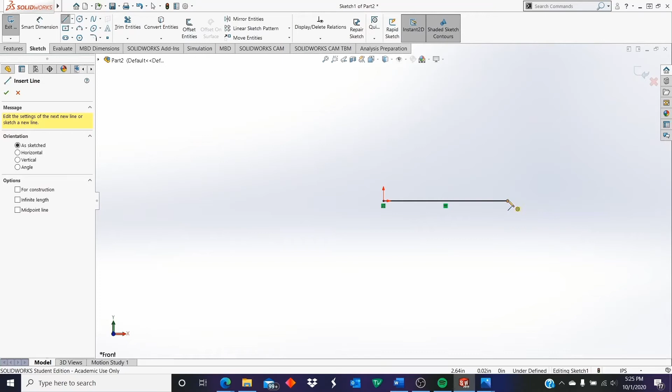So I'm just going to go ahead and delete this blue line. Now I'm going to go and just draw a line here, and draw a line here.

So, same thing with this, as you could tell, another black line came and took place. And these two immediately happened because they're off of the point of origin.

So now, let's say you're making a regular shape where both the left and right sides are two different sizes. You could go ahead and establish their heights. So, there you go.

Now, if you add, let's say, the top, you're going to end up running into too many dimensions, which, if you look right here, is fully defined. What you can do is, let's say, we'll just delete this dimension.

Now I'm going to left click, control, left click this line, and now you have a bunch of other relations taking place. You have vertical now, which is just identifying that the line's running vertically. You have collinear, then you have perpendicular, a line reaching the point of another line, not necessarily at an endpoint. It could be a midpoint or somewhere in between the midpoint and endpoint.

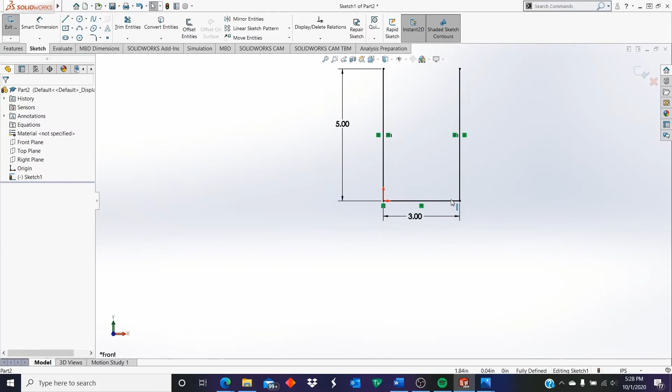So whenever you want, you could change this. Let's say you want a 5. You set it to 5, and it's going to make this side the same thing because they're equal to one another.

Alright, so now I'm going to go ahead and just cap it off. And still, as you could tell, it still states that it is fully defined.

One of the relations, when I pulled up the relations bar and set equal the left and right lines, one relation did not occur, and that's your tangent relation. Your tangent relation works best and optimal when you're dealing with some kind of curve or a circle.

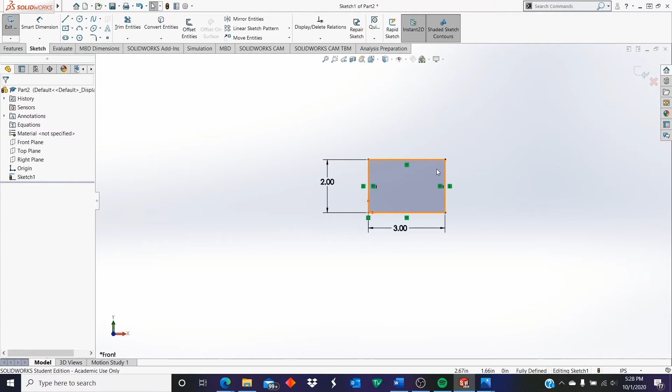So I'm just going to go ahead and delete this line, in which, as you can tell, the equal is no longer present. So I'm just going to make a circle and set it to 1.

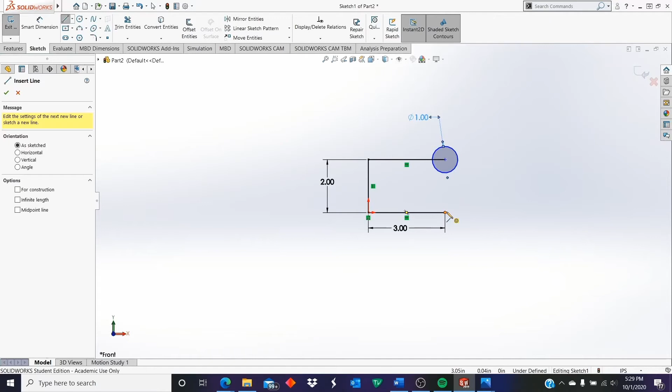You're going to grab the line, and if you run up, this just makes it coincident. Dealing in a scenario like this, having a line meet a circle, this is all it's doing—it's just the two coming into contact.

But what you want is to have it combine, more or less flow into one another. So you just click to the side. Now, left click the line, control click the circle, and click tangent. So now this joins them together as if it's one flow.

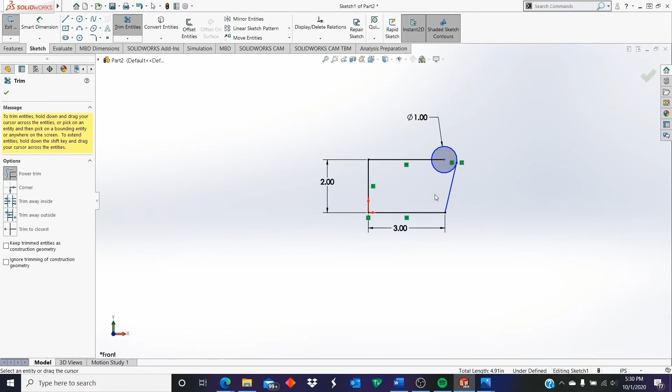So now you can go here, get rid of that part of the circle, get rid of that, and now you have something defined.

Somewhat now. As you can see, there's still the blue lines, and this goes into my point earlier. Now, if I grab these parts, these blue lines are only going to move, and that's it.

Which is the last thing you want, compared to having this black line that just stays there. So what you're going to do is click this point right here, and we're going to set it to fix.

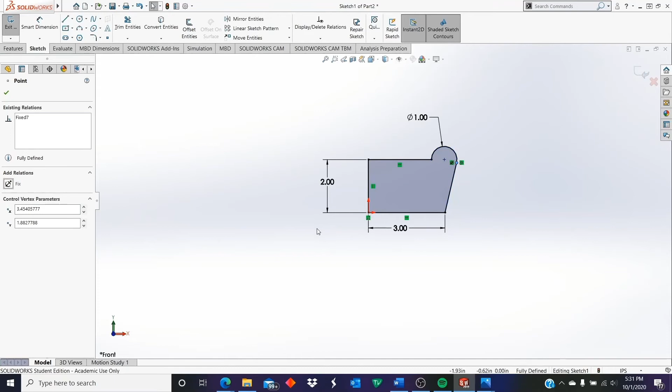And now it's one solid black line, and we could grab a point and it won't move.

So now I'm going to go over the mass properties, and kind of help visualize. I'm just going to go here and extrude it—nothing in particular.

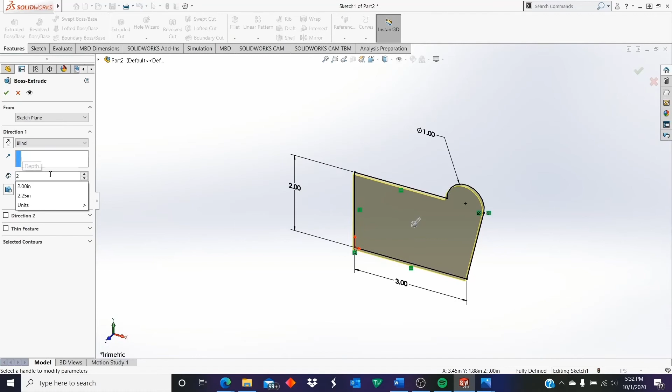So from here, if we look under evaluate, we look under mass properties, we have density, mass, volume, and surface area. Since our part doesn't have any specific material, it just goes to a default, so your density and mass are going to be, best way to put it, default—there's nothing specific to go with it.

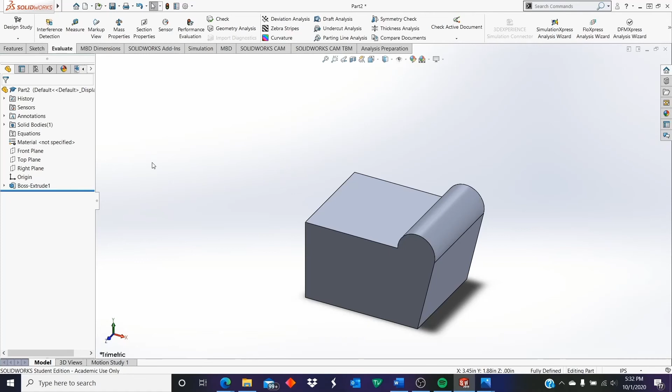And one thing I'm pointing out is when you do some of the homework and practice problems, and especially the certification, it will ask you to make the part and put it under some kind of property. So to access these material properties, we're going to right click here, move down to material, and edit material, and now we have all the materials that SOLIDWORKS offers.

And if we look at each one, they have a corresponding value for each aspect—you get mass and density, tensile strength.

So for this, I'm just going to go here and say gray cast iron, which if you look at this, has its own set of values corresponding to gray cast iron reality. So we click apply, and just to be safe, we'll click apply again.

We exit. Now, as you can tell, the part is in a different color. It's not in that kind of gray that seems to be like a model or clay.

So now, if you go back to evaluate, mass properties, our density and mass and volume have all changed—probably not volume, but the mass and density has changed to correspond to the gray cast iron.

And that's all I wanted to discuss within this video. I just wanted to point out these three aspects: defining where to locate it, giving you the heads up, and if it does occur, having your relations to help counter certain situations. I also discussed how to acquire those relations. And the last thing was material properties.